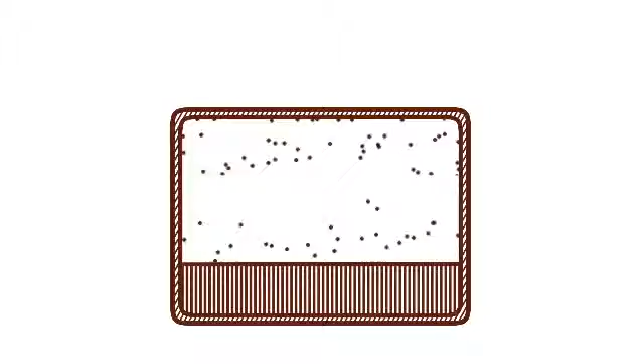The first rule is that the heat of vaporization is powerful. It just takes a lot of heat to change a liquid into a gas. In this process of changing a liquid to a gas, we will call it interchangeably evaporation or boiling, depending on which word seems more intuitive for the process we're trying to describe. But for our purposes here, we can think of them as the same thing. Now, the reverse holds also. We require heat to change to a gas, but we produce heat when changing a gas to a liquid, and we'll call this condensation. So coolant that is evaporating or boiling is cold, and coolant that is condensing is warm. That's important.

The second rule of physics we need to buy into before proceeding is as follows: the boiling point of a fluid is a function of pressure. You already knew it was a function of temperature, but it's also a function of pressure. Low pressure induces boiling - you may think of low pressure as kind of pulling apart the denser liquid molecules, thus changing their state to a gas. High pressure induces condensation - again, we can think of high pressure compressing the dispersed gas molecules into a denser liquid. And all this boiling and condensing can be accomplished by pressurizing and depressurizing the coolant.

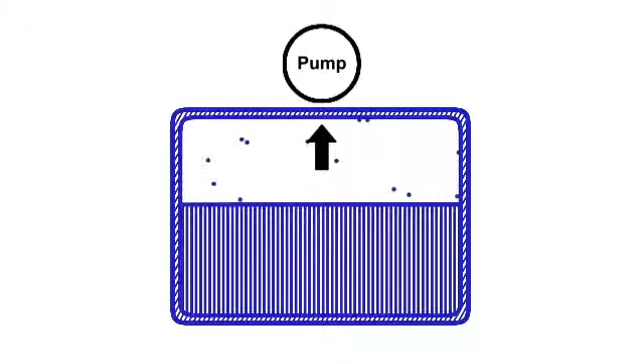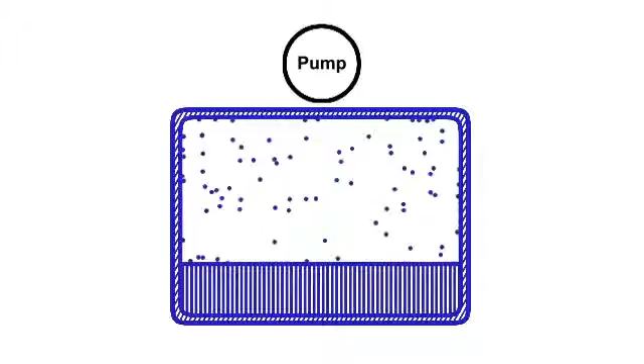You've likely heard that water boils in the high altitude environment, which is another way of saying low air pressure environment, of Denver, at some lower temperature. Well, it does - it boils there at about 195 degrees Fahrenheit rather than 212. And the opposite holds: instead of 212, water boils in a pressure cooker at about 230 degrees Fahrenheit.

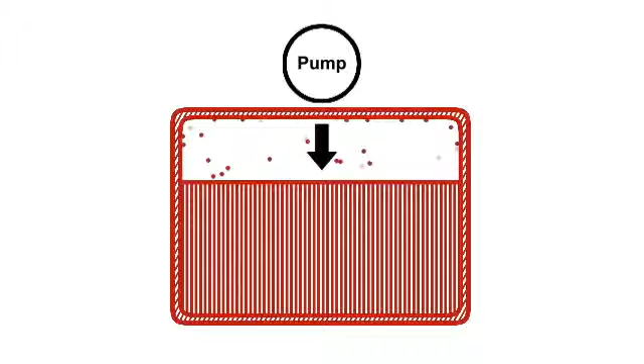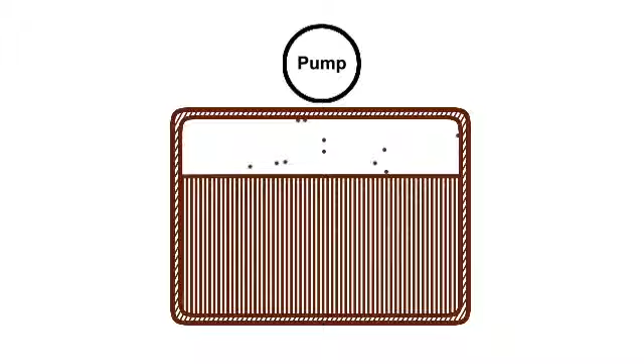This is important stuff because it means that if we put coolant in a loop, boiling can be induced by reducing the coolant's pressure in the evaporator, and this makes the evaporator cold. And condensation can be induced by simply increasing the coolant's pressure in the condenser, making it warm. And so it goes, round and round, low pressure to high pressure and back, evaporation to condensation and back.

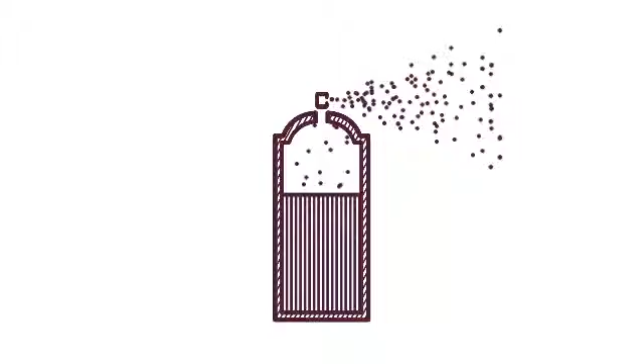You directly experience something like mechanical cooling when operating an aerosol can that, when sprayed, has cooled in your hands. What's happening there is this: by releasing the nozzle, you release some of the pressure inside the can. And we already found that with decreasing pressure comes boiling - the fluid is turning to gas. Boiling requires heat in order to change the liquid into a gas. And your hand feels colder because that can sucks the heat away from your hand to facilitate a state change inside the can itself. The can feels cold.

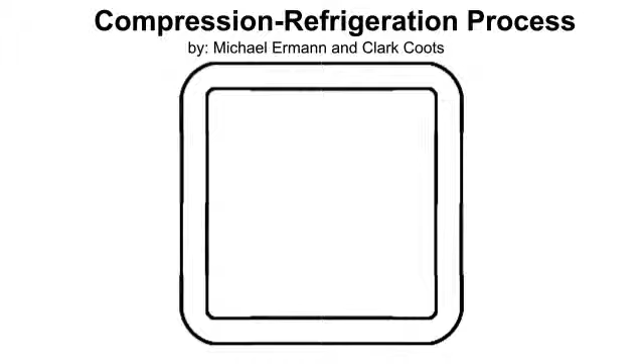The compression refrigeration process - let's diagram the compression refrigeration loop, air conditioning. We'll start with a looped tube, a closed looped tube, and we'll fill it with coolant. Coolant or refrigerant is a fluid that, in this case, has a boiling point somewhere near room temperature. A fluid may be a liquid or a gas, and here it will be a bit of both. Now, let's insert a pump into our closed loop of coolant and begin circulating the coolant around.

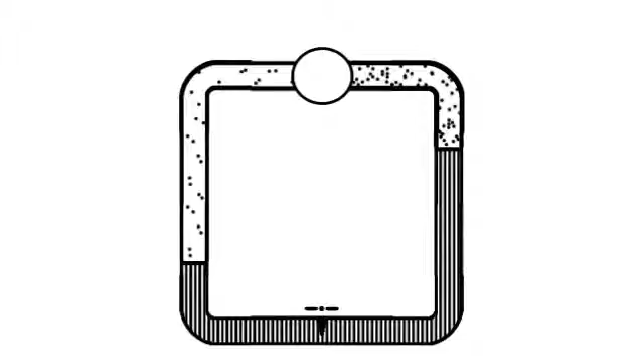At the other side of our diagram, opposite the pump, we'll insert a valve. Think of a faucet that's almost closed, letting just a bit of fluid through but keeping most of it back, building up pressure on the upstream side of the valve.

Very quickly, we'll see that we have most of the fluid on one side of the loop, a high-pressure side downstream of the pump and upstream of the valve. The other, low-pressure side, downstream of the valve and upstream of the pump, has less fluid because the pump is busy trying to move the fluid around faster than the valve is letting it through.

Here we draw from our aerosol can example. On the high-pressure side, we are pushing, squeezing the gas molecules, forcing them into a liquid state. And on the low-pressure side, we are ripping the molecules out of their liquid state and into a gaseous state. We are condensing on the high-pressure side and evaporating or boiling on the low-pressure side.

Remember the power of the heat of vaporization? Boiling requires heat, it makes things cold, and condensation gives heat, it makes things warm. So by boiling on one side and condensing on the other, we are creating a cold side and a warm side of our pipe.

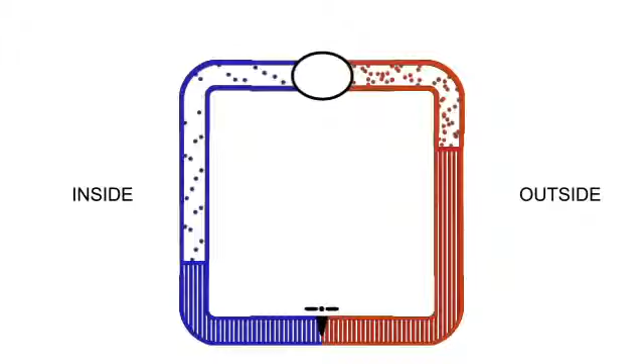Now let's position the cold side on the inside of our building and the warm side on the outside of our building, and add 2 fans, one per side, to bring air over each pipe.

We might then draw in room air at room temperature, say 70 degrees Fahrenheit, run it over a cold pipe, and supply it back to the room at 50 degrees.

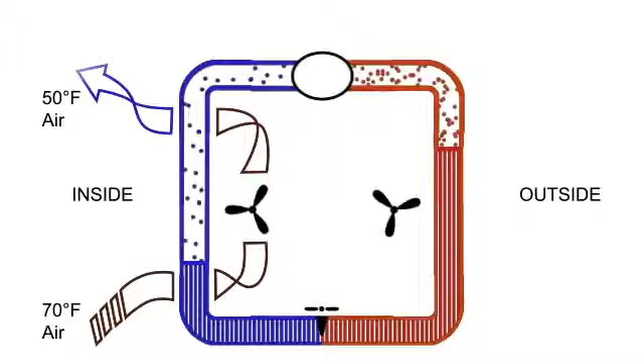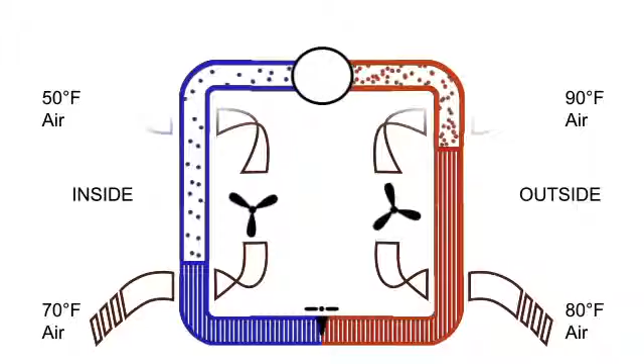Likewise, on the outside hot loop, the one with the condensing coolant, we will utilize a fan to draw 80-degree outside air across the hot pipe and deposit it back to the outside air at 90 degrees.

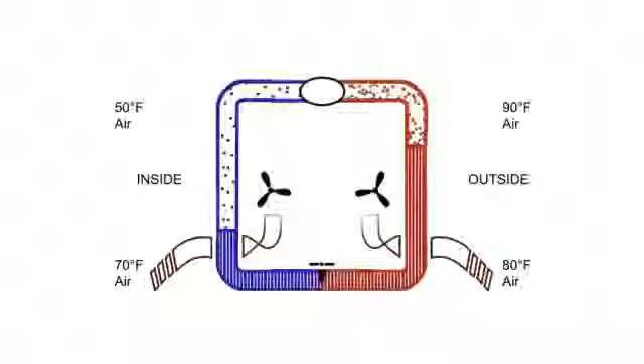We now ensure that the 2 air streams don't come into contact with one another. We'll put a little wall between them, and you'll recognize that we've diagrammed a window air conditioning unit.

In technical parlance, this type of equipment is also called a unitary system or a direct expansion system, and direct expansion is sometimes abbreviated to simply a DX system.

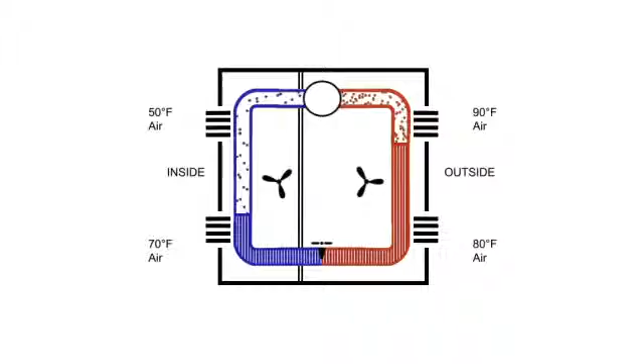This is a window unit, the simplest manifestation of air conditioning we see in buildings. But even the more complex versions of this system, the ones we'll see in forthcoming diagram animations, will essentially entail the same process, only heat will move around in a more efficient way, or will be used to service more than just one room, or both.

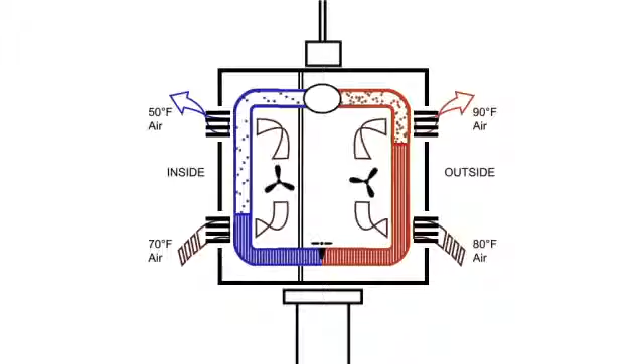Compression refrigeration components.

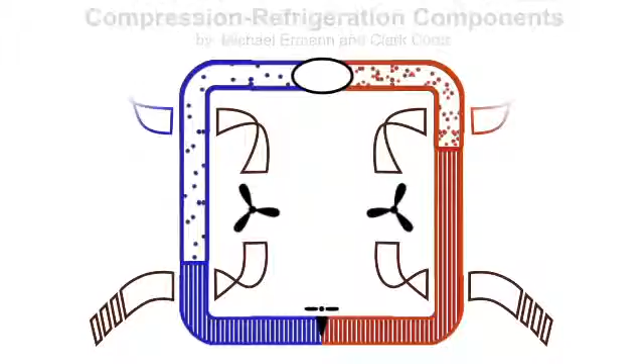Picking up where we left off with our compression refrigeration loop, remember we have a condensing side under high pressure, where gaseous coolant transitions to liquid coolant. It's the hot side. And opposite it we have an evaporating side, under low pressure, where liquid coolant transitions back to gas. It's the cold side.

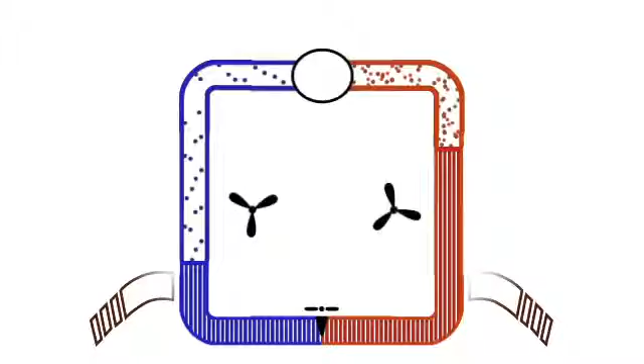Each side has air blowing across the pipe. Importantly, it's not the coolant itself that comes into direct contact with the air, but rather it is the pipe that carries the coolant that exchanges heat with the air.

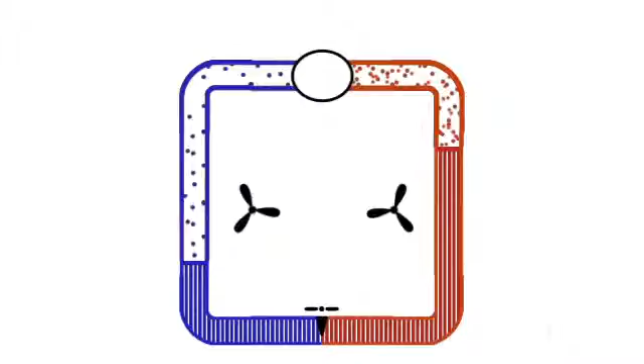Now, since the air blows across the pipe for the purpose of moving heat, efficiency dictates that we would prefer to maximize the surface area of each pipe to facilitate heat exchange. We will draw it like this, as a squiggle, and refer to each heat exchange squiggle as a coil, though it may, in practice, look more like a series of metal fins.

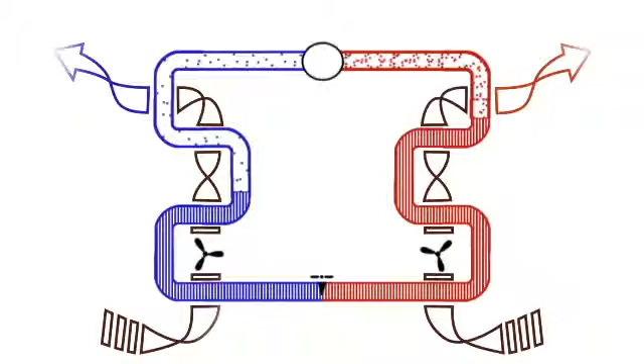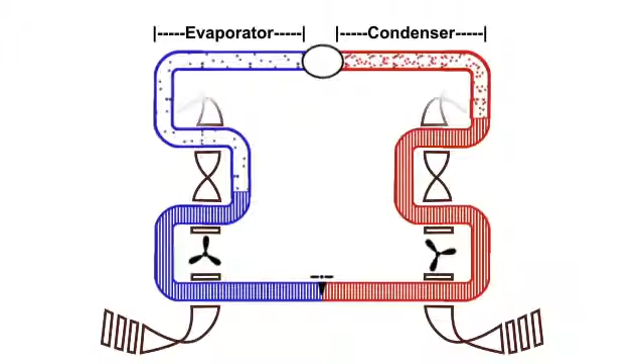The part of the loop where evaporation takes place, the cold side, is termed the evaporator, and the portion of the loop where the gaseous fluid condenses is termed the condenser. What we were calling the pump that moves the fluid around is actually termed the compressor, and the valve that lets only a bit of fluid through at a time is called the expansion valve.